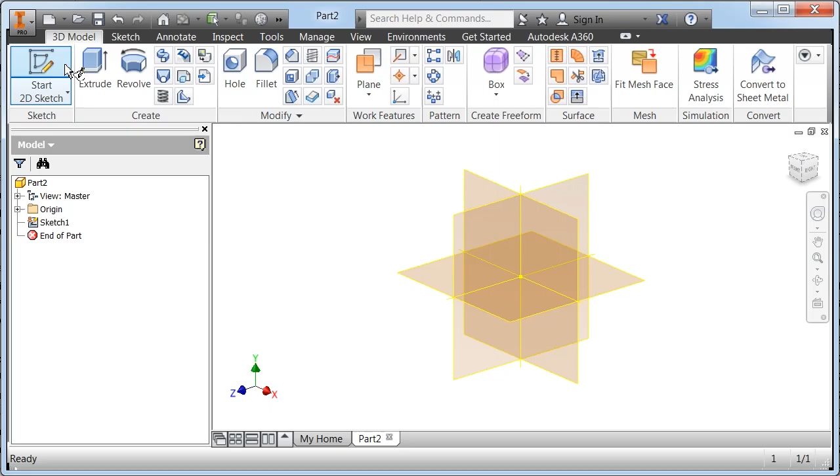So we'll start by moving our cursor to the upper left portion of the screen and left click on Start 2D Sketch if you're not already to this point. The default planes that Inventor uses will appear. I'm going to move the cursor over to the XY plane, the front plane, and left click one time once it becomes highlighted.

Then you'll have these lines that appear in the screen, and this basically illustrates that we're in the sketch area. These lines will disappear once we exit out of here into the 3D model area. So I'm going to move my cursor up here to the line command. I'm going to left click one time. And we'll start by just drawing out a box.

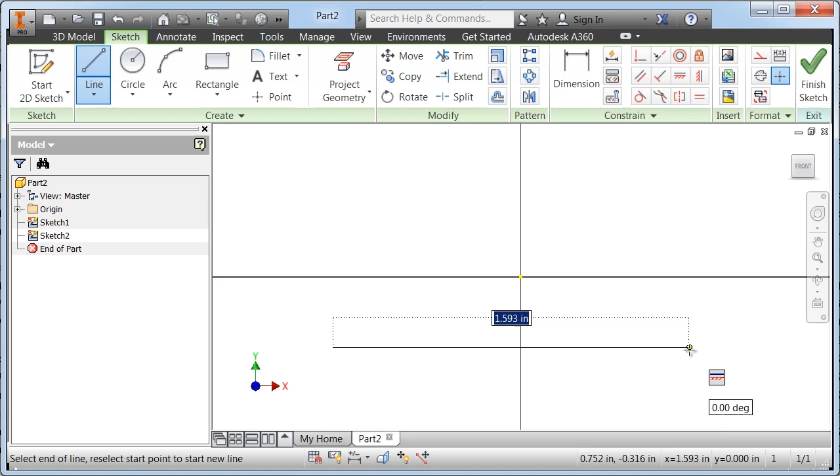So I'm going to left click, I'm going to drag my cursor over. I'm going to make sure I keep the line perfectly horizontal. I'm going to left click again, drag a line vertically, make sure it's at 90 degrees. I'm going to left click again, I'm going to drag it back. Now what's important here is the dashed line that will appear that tells us we're lined up with the original endpoint, and it is right there. So I'm going to left click one time.

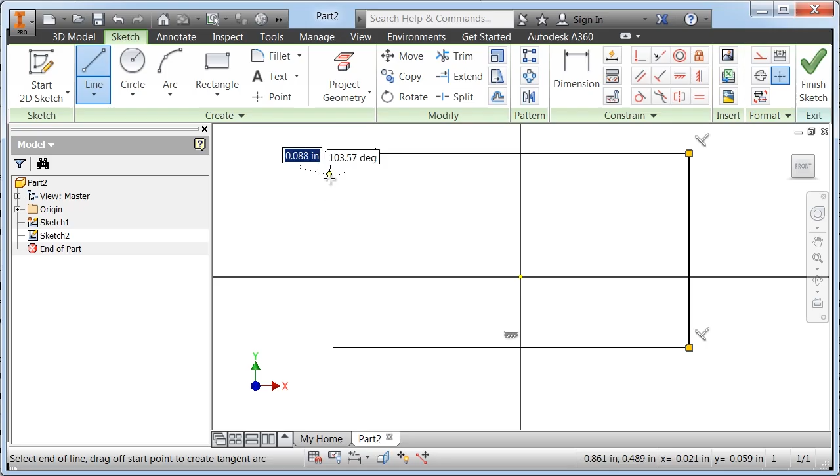I'll move the cursor down here to the beginning endpoint. This time I'm looking for the green dot. That tells me it's a closed profile. I'm going to left click one time. Then I'm going to right click and I'm going to left click on OK.

Now to create a solid model, a sketch has to be a closed profile. There can't be any gaps. You can't have a line over an existing line. A straight line that is made up of more than one line will cause a problem. So if it's a straight line, it has to be one single line. And then there can't be any opens and there can't be any spare lines hanging out in space someplace. So everything has to be a closed profile. And as we go through some more of the videos, we'll gain a better understanding of this.

So now I'm going to move the cursor over here to the dimension icon. I'm going to left click once. I'm going to move the cursor down here onto the line. When the line becomes highlighted, I'm going to left click one time and I'm going to drag the cursor down, and attached to the cursor is going to be the dimension. In this case, we want the dimension to be 2. So once I get the dimension placed where I want it, I left click once.

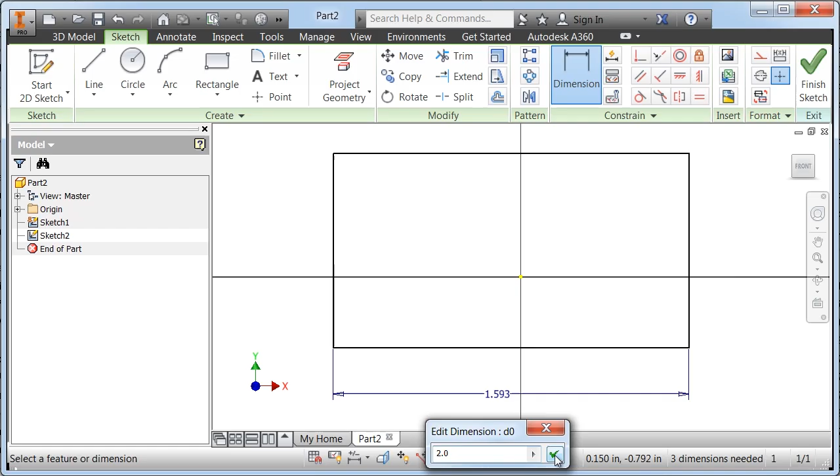The Edit Dimension dialog box comes up. I'm going to enter 2.0 and I'm going to hit Enter on the keyboard, or I can hit this green check mark right here. And that will increase the distance there to 2. And Inventor automatically scales it up. So I'm going to use my mouse wheel and wheel it out a little bit, zoom it out. Now we're still in the dimension command because the dimension icon is highlighted or active.

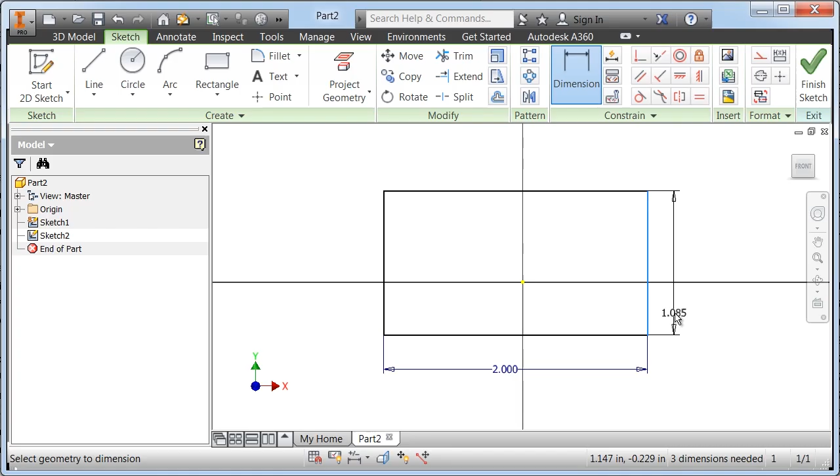So I'm going to move the cursor over here to the right line. When it becomes highlighted, I'm going to left click one time and I'm going to drag my dimension down here because this is only going to be 0.25. So I'm going to left click once. When that Edit Dimension dialog box comes up, I'm going to enter 0.25. I'm going to hit Enter on the keyboard or hit that little green check mark. And then I'm going to right click and I'm going to left click on OK. So right now we have a squashed down rectangle.

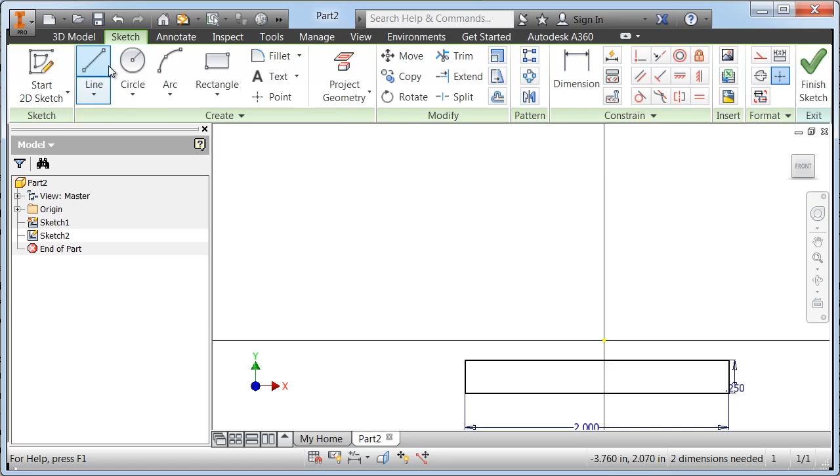Now to move this around on the screen, I can pan it by just pushing the mouse wheel down and holding the mouse wheel down and treating it like a button. And I'm going to move it kind of to this position as shown. Then I'm going to go back to the line command. I'm going to left click on the line command.

And I'm going to come down here and I'm going to left click right on this corner. I'm going to left click once when that green dot shows up. Drag a line upward vertically at 90 degrees. I'm going to left click one time. We'll drag the cursor over, left click one time, left click one time, left click again, and I'm going to come down and click right on this intersection.

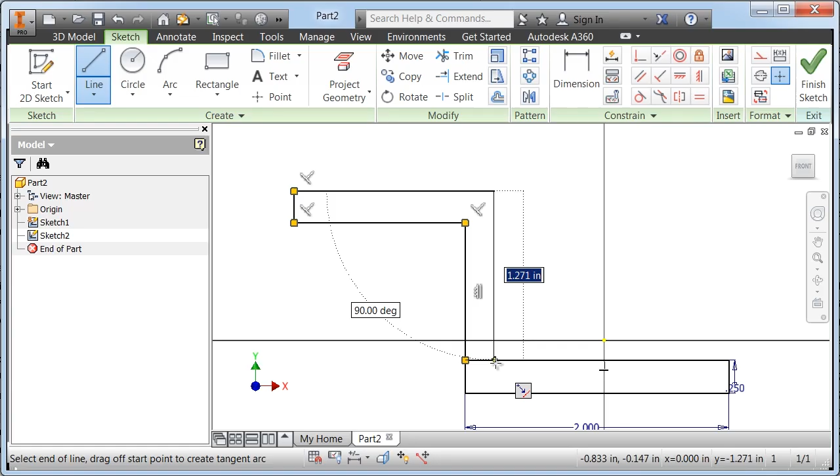You don't really get a green dot, but it does know. As long as you get real close, it will snap it to that existing line. And then I'm going to right click, I'm going to left click on OK. So we have our finished sketch. Now we need to do some cleanup. First we need to finish dimensioning it, and then we'll go in and do some editing work here and here.

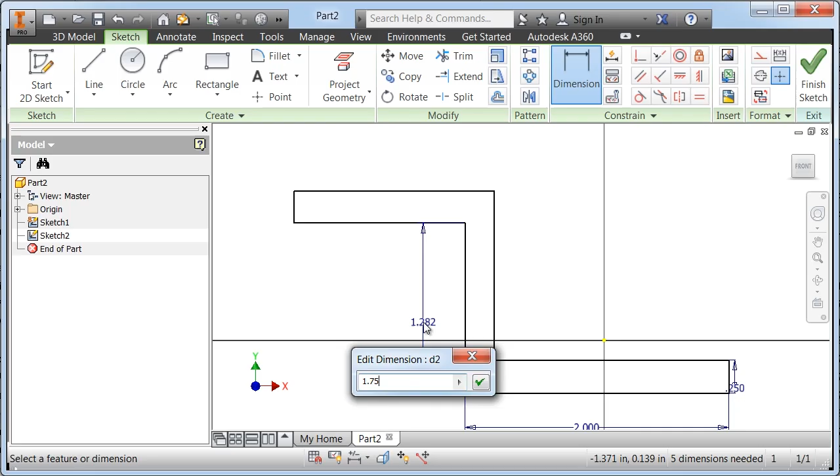So I'm going to left click on the dimension icon. We'll left click here, here, and we're going to enter 1.75. I'm going to wheel it out just a little bit more. And while the dimension tool is still active, we'll left click on this line, enter 0.25. We'll left click, enter 1.75.

And then we'll put a spacing distance between here. I'm going to move the cursor and left click on this line, and a dimension is going to be attached to that line. Well, we just ignore it because we want to dimension to this line. So even though there's a dimension attached to the cursor from the first click, we just ignore that. We move the cursor over here to the second line, left click again, and now Inventor knows that we want to create a dimension between these two lines. This will also be 0.25. Then we'll right click, left click on OK.

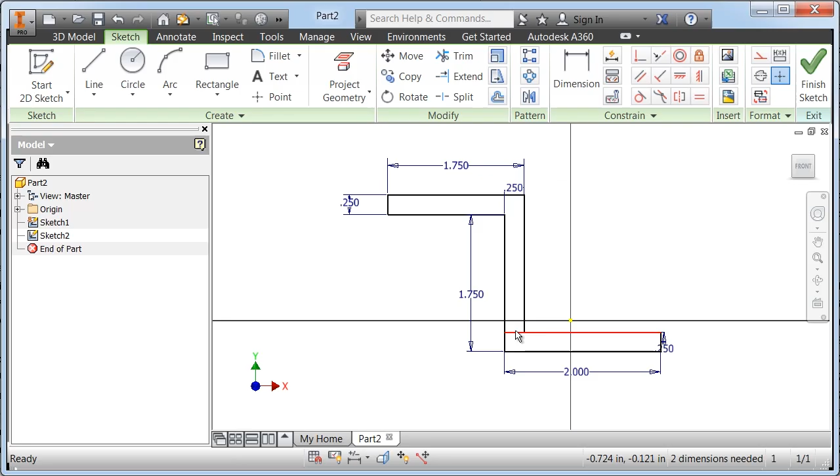Now we have some housekeeping to do down here. Remember I said that the profile has to be open all the way through on the inside. It has to be a closed profile. There can't be any gaps, and you can't have a line over a line, and you can't have double lines making up what a single line could. So I'm going to wheel in here just a little bit. So I have a couple problems. For starters, our sketch is not open through the inside. I've got this line here in the way.

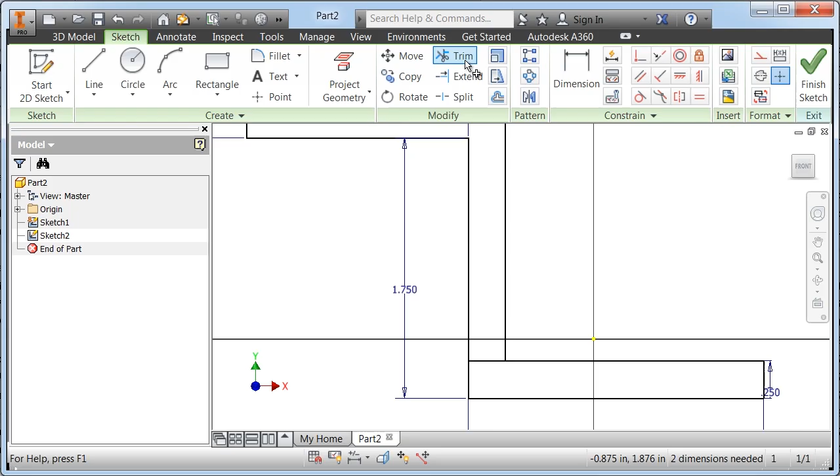So I'm going to move the cursor up here. I'm going to left click on trim. If you use trim in other software packages such as AutoCAD, you have to specify the fence and these kind of things. With Autodesk Inventor, you just move the cursor over the part you want to get rid of, and Autodesk Inventor will guess. Right there, it's dashed lines, which means that's what's going to be trimmed. That's what I want trimmed, so I'm going to left click one time. And that's as easy as it is to use the trim function. Pretty basic. So I'm going to right click, left click on OK.

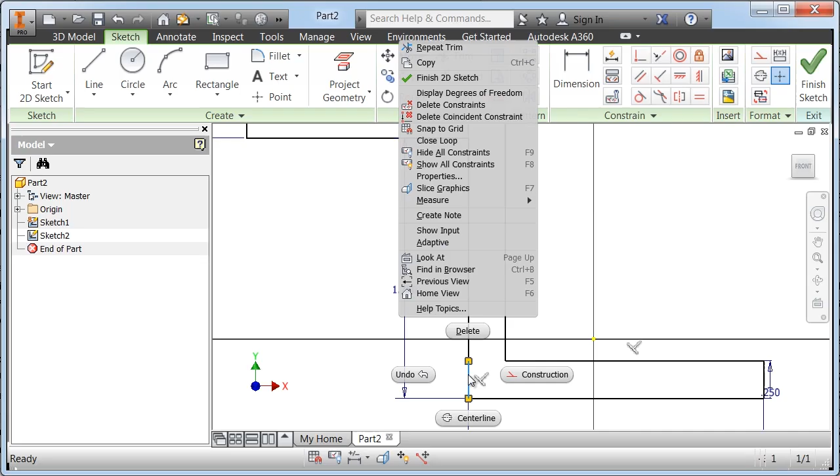Now one last item is I've got two lines making up a single line where a single line should be. I've got a little short line down here, and then I've got a taller line up here. I want to get rid of this short line and then extend the taller line. So I'm going to move the cursor over the short line. When it becomes highlighted, I'm going to right click one time. I'm going to left click on delete.

Then we'll go up here to the extend command. Works very similar to the trim command. I'm going to left click on extend, and Inventor will try and guess which way you want to extend. If I move the cursor up here to the top, it wants to extend the line upward. If I move the cursor down here to the bottom, it wants to extend the line down. This is the direction I want to extend, so I'm going to left click one time. Then I'll right click, left click on OK. And now this is all one single line.

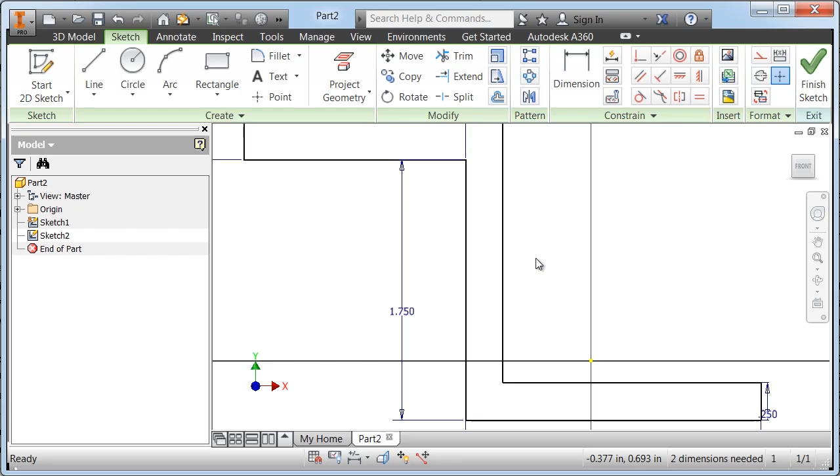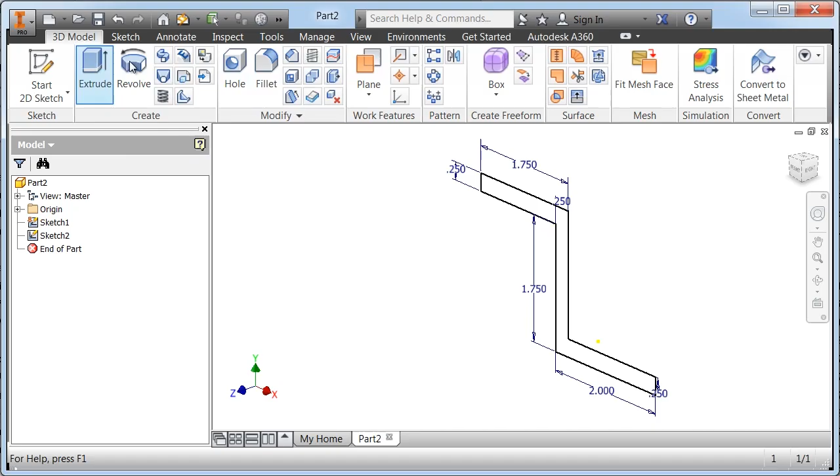Now I'm going to wheel out. I'm going to right click, left click on Finish 2D Sketch. Inventor zooms it in, so I'm going to wheel it out a little bit more, and I'll pan it down. Now I'm ready to extrude this. I'm going to move my cursor over here to the extrude icon. Notice that the tools have changed now. We're not in the sketch area anymore. We're in the 3D model area.

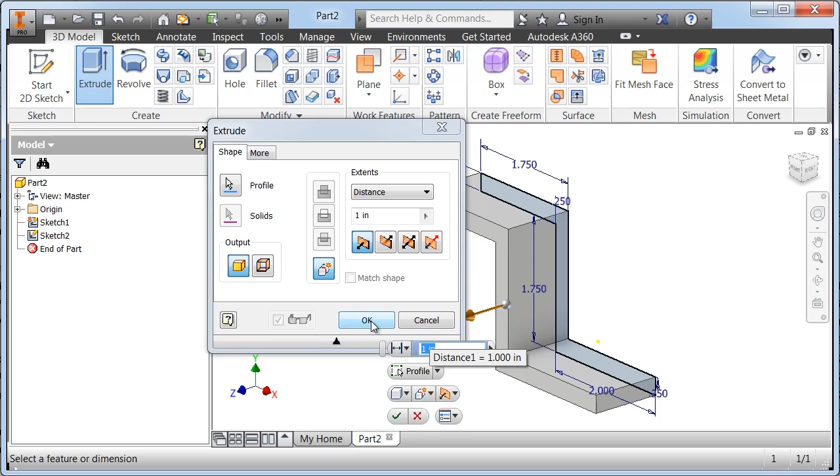I'm going to left click on extrude. And I'm going to come over and just move my cursor over here. And most of the time it'll find it without even having to select it. And that's the case here. So I'm just going to take the default one, and I'm going to left click on OK. And we now have a solid.

Now we'll do some cleanup work here. Let's add a fillet. And if you've used AutoCAD before, fillets typically meant you would left click on this line and then this line. Well, in Inventor, you left click on these edges. So I'll move my cursor up to the fillet command. I'm going to left click one time.

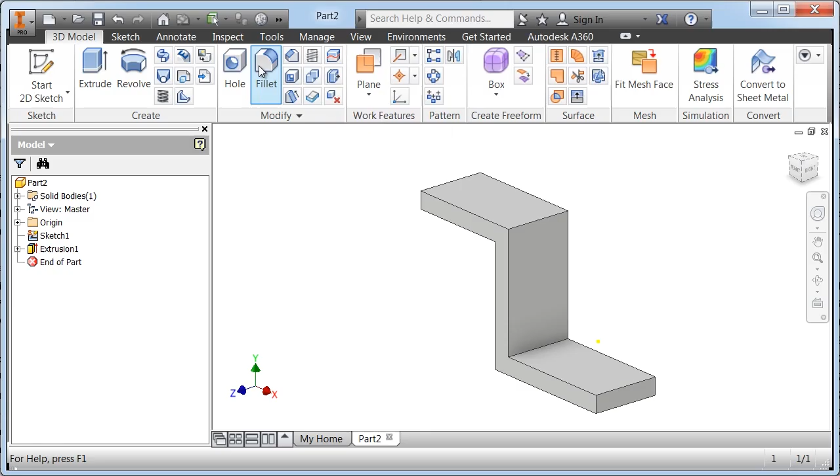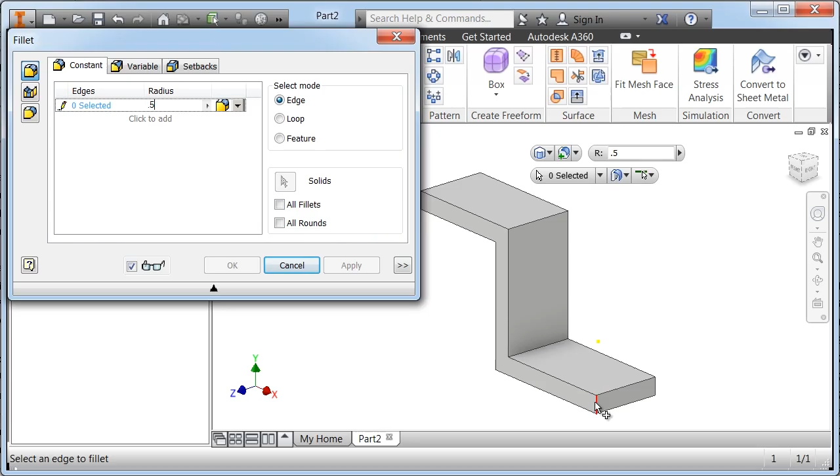And this doesn't look like an area where you could enter any kind of dimension, but it really is. You just highlight it. We're going to enter 0.5. We want a 0.5 radius. Then I'm going to drag this box out of the way. I'm going to move my cursor over here to this edge. I'm going to left click one time.

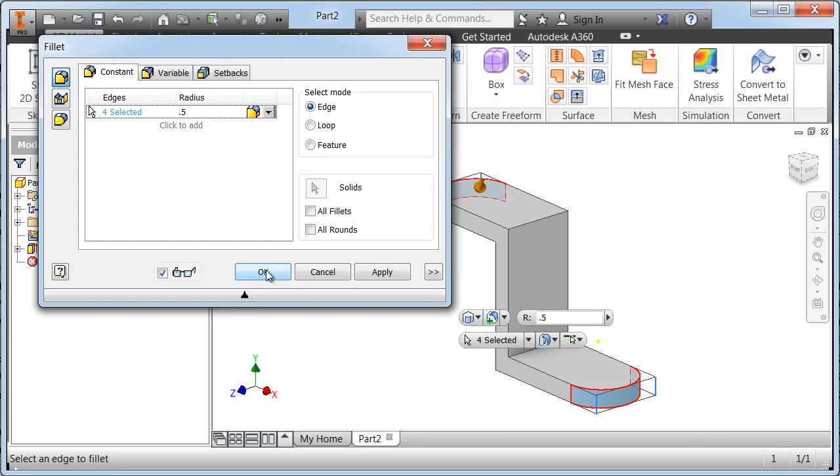I'm going to left click one time. And then I'll move the cursor over. And if I float the cursor back here, it'll even find that edge without having to rotate the part around. Left click one time. And then we'll move the dialog box back. We'll left click on OK. So now we've got some rounded edges. Kind of dresses the part up a little bit.

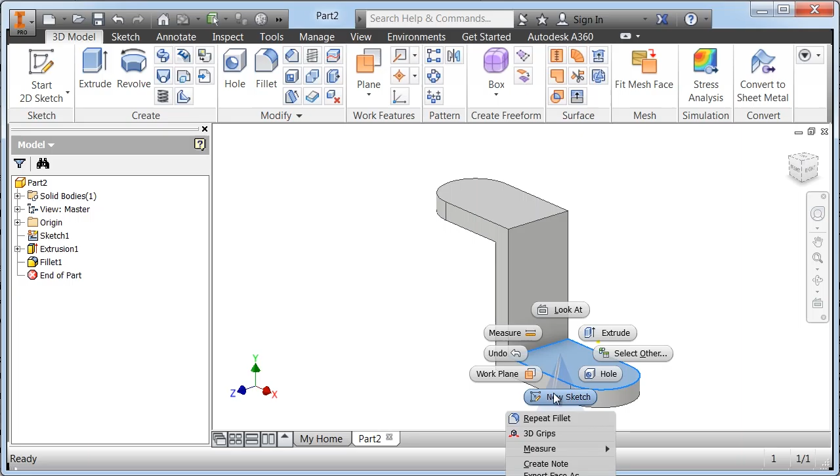Now I'm going to move the cursor over this lower surface and I'm going to create a sketch here. And the way I do that is just move my cursor over it. When it becomes highlighted, I right click one time and I left click on New Sketch. Now Inventor rotates the part up, and that's fine if you want to do that. If you want it back where it was, you simply right click and say Previous View. I'm going to leave it like that for right now.

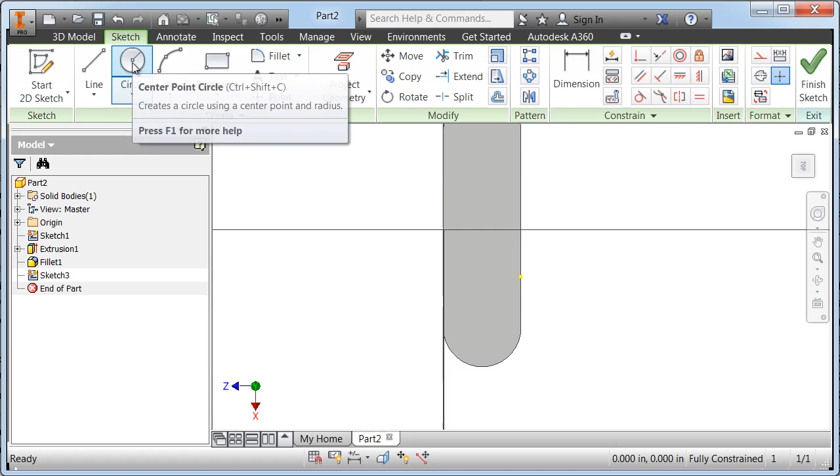So we're going to put a circle on here and then use an extrude cut to cut a hole in the part. So I'm going to left click on Circle. I'm going to move the cursor down here to the outside edge of this fillet. I'm going to wait there about a second and eventually the center radius will show up. I'm going to left click on that when you see that green dot and we'll drag a circle out. Then I'll right click, left click on OK.

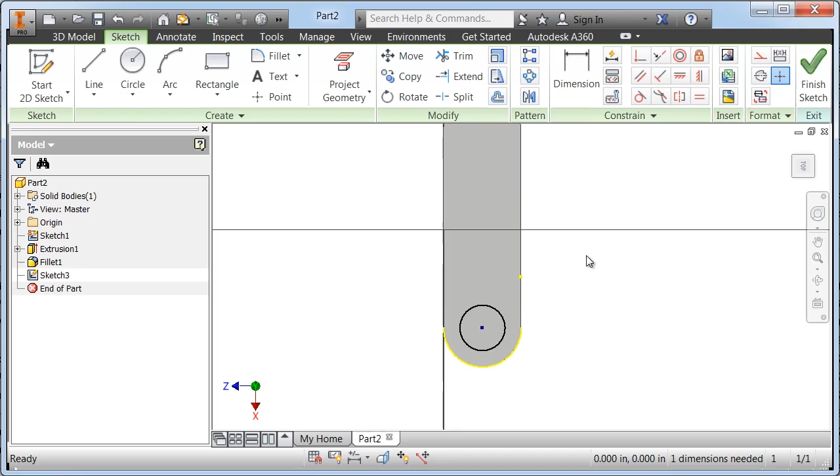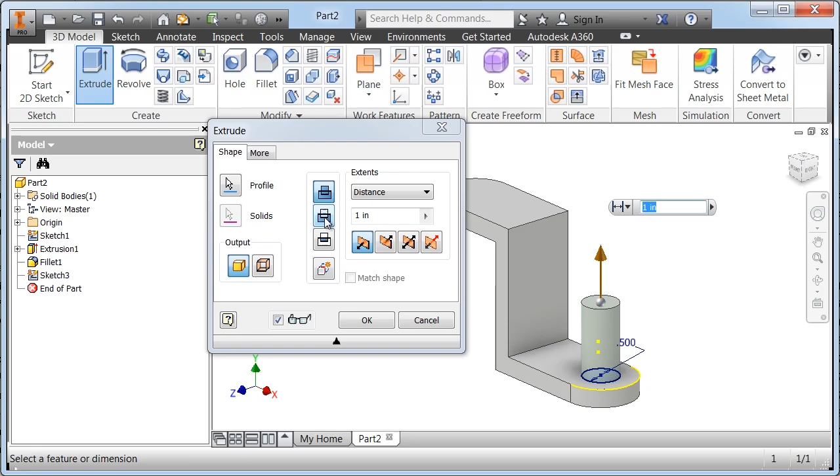Then I'm going to left click on Dimension, left click on the edge of the circle, not the center, enter 0.5. Then I'm going to right click, left click on OK, right click again, Finish 2D Sketch. Then we'll go up here to Extrude. And right now it wants to extrude a pin from this circle. I want it to cut. So I'm going to left click on the cut icon. Inventor automatically changes the direction of the extrusion, since the only way it will cut is if it's going the other way, and then left click on OK.

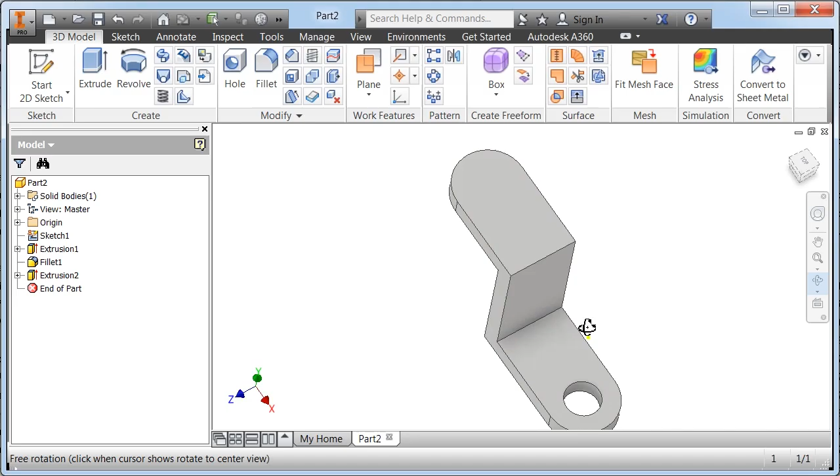Now if we want to see what this looks like, we use the free orbit icon or rotate icon, and we just push the mouse wheel down. We have to left click inside that white circle. This white circle appears around the part. Left click anywhere inside and just hold the left mouse button down. You can drag the part around and see if that is kind of what we had in mind for an extruded cut. When you're done admiring the part, you right click, this pop-up menu comes up and you left click on OK.

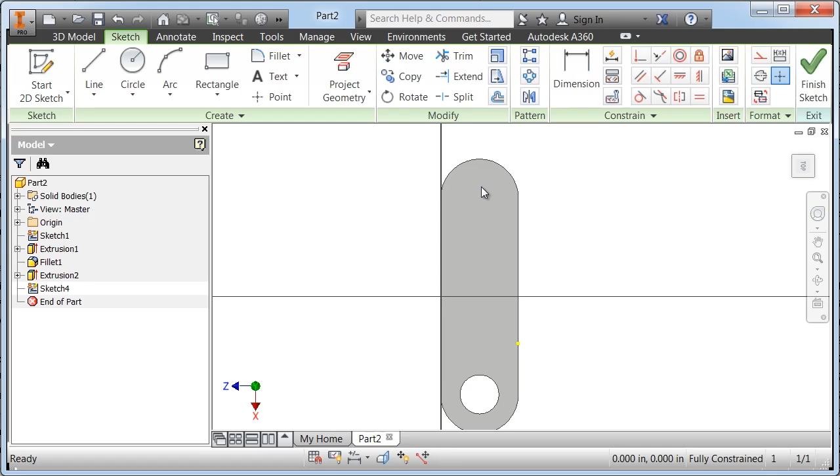Then we'll move our cursor up to the upper surface. I'm going to right click, I'm going to left click on New Sketch. I'm going to pan it down by holding the mouse wheel down and pulling the part down. I'm going to left click on Point. I'm going to move the cursor over here to the very edge. Once that center appears, I'm going to left click. Then we'll right click, OK. Right click, Finish Sketch. Now we're going to use the Hole Wizard.

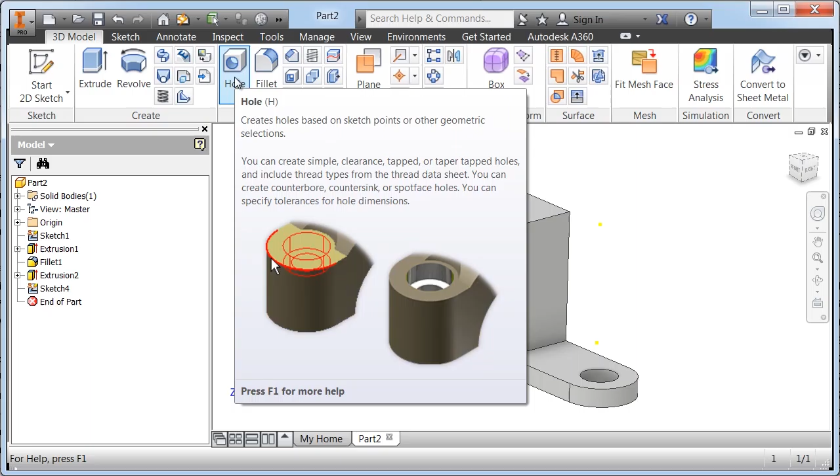We're going to left click on Hole. We're going to use the counter bore, and then we'll enter in some information here. So for the top dimension, we're going to enter 0.5. For the next dimension down, we'll enter 0.125. The third dimension down, we'll enter 0.5. And the last dimension we'll use 0.25.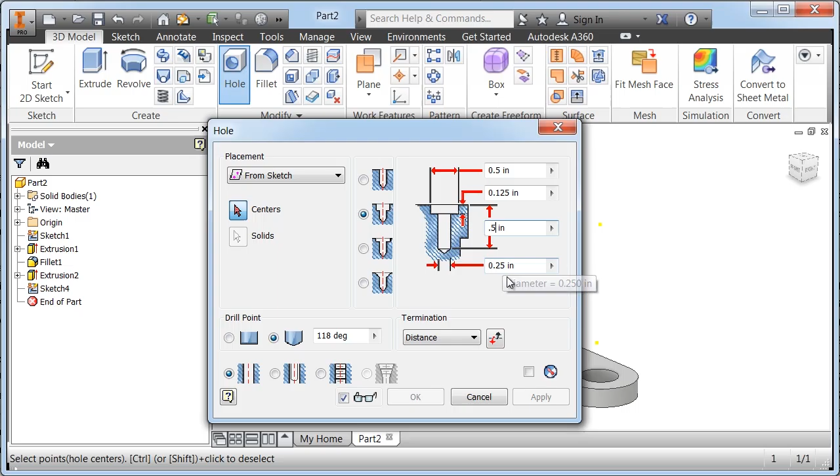Then we need to move our cursor out of the way and left click on the point itself. Left click one time and then we left click on OK, and we'll use the free orbit command. We're going to left click inside the circle and we have a nice counter bore in that very top surface. Then we'll right click, left click on OK.

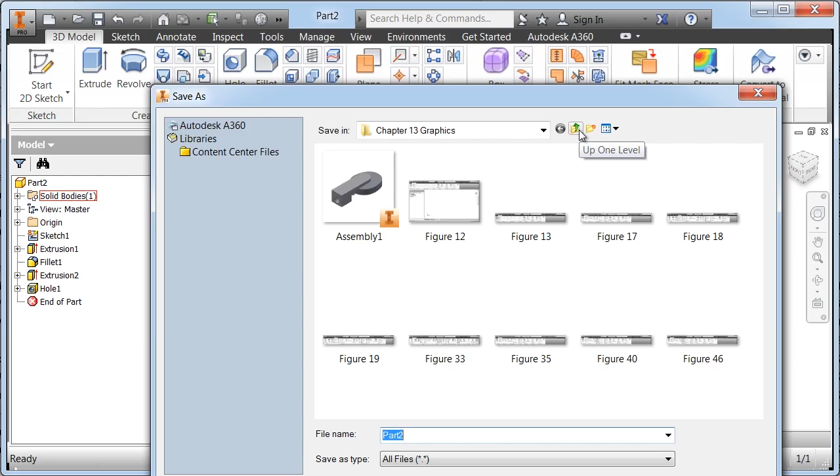Then we get ready to save the part. We'll go over here to the arrow next to the I for Inventor. We'll left click on that. We can do a Save As. And then we can just save that in pretty much any place we'd like. Put that as Part 2, hit Save. And the part is now saved as Part 2.

And this concludes this module of Inventor. And for the getting started,